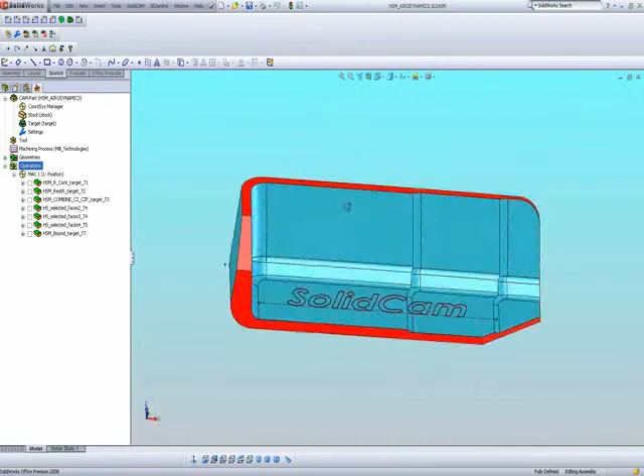SolidCAM has many ways of dealing with parts such as the one we see here. What's special about this particular part, although it may look simple, is that if I were to take a top view of it, you'll see almost every single wall is at a specific angle, and we even have walls in the back which are at an undercut. There's really no way to do this properly using only 2.5D options.

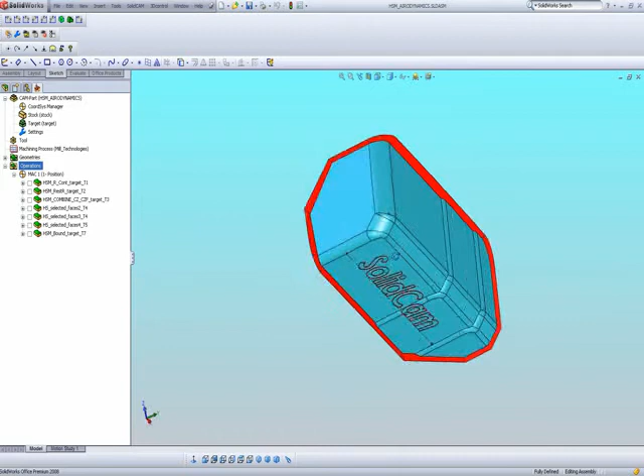So in SolidCAM we have a few options to deal with this. In this particular part, we'll be using HSM, high-speed machining, to mill out most of it. And for those undercut areas and specific surfaces, we'll be using high-speed surface machining. We'll start off with our first operation, which will be a rough cut of our part.

We'll go into the first operation that I've created. You'll note, first of all, I'm using the contour roughing, which basically roughs out most of the material. The tool that I'll be using will be a 20mm tool, a relatively large tool, to get as much material out as possible.

The constraints will be automatic according to the stock material that we have. And for the passes, I'll be going down every 3mm, and I'll be leaving 0.5 millimeters of material for finishing. Remember, you can see all of these options - every single field that I click, you can see what's going on in the picture on the left hand side. Tolerances, step down.

In my links, I'll be working on climb cutting. Let me just go back to my passes area. One other thing I did not note was that I'll be working with detect core areas - in other words, if I can work from the outside into the part, in this particular case I can work in that sort of fashion rather than working from a pocket out. My links, since I'll be working most of the time from outside in, for my ramping, I will do a plunging ramp.

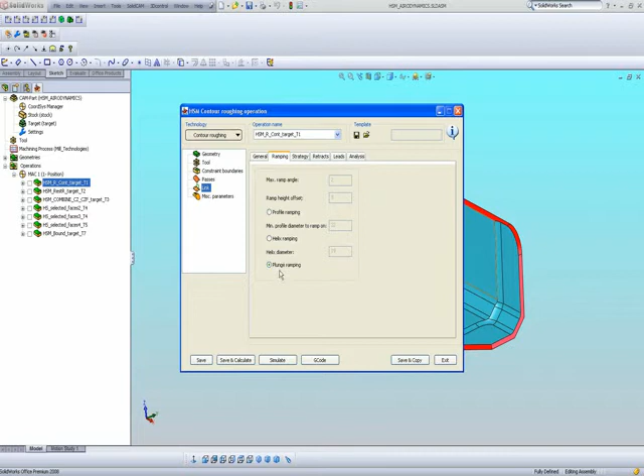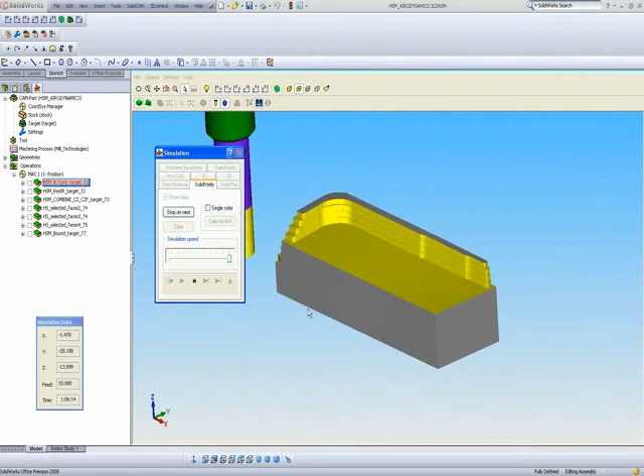Now if I go into my simulation - I'll run the simulation a little slow - you'll note the tool is working from the outside, clearing away most of the material from all sides of the part, wherever there's material that can be taken off.

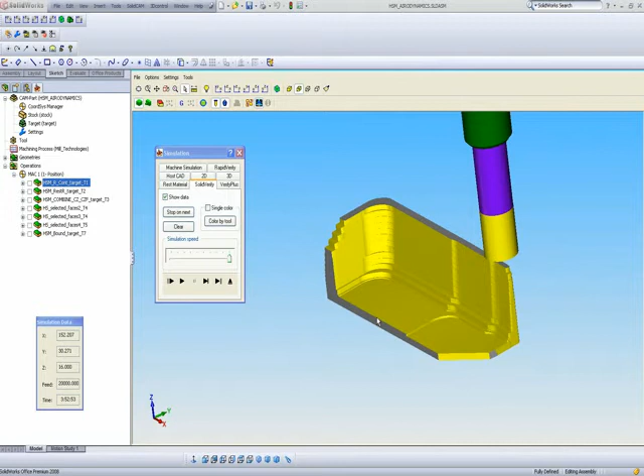Now you'll note also that in some cases the material that was left, since we went down every 3mm, is a little bit too big - these steps over here are a little bit too big for finish cuts. So we'll do another operation, what we call rest rough.

On this second operation, I'll be using, like I said, the rest rough option. The tool, I'll be using a smaller tool, and obviously I'll be going according to the previous operation - in other words, work the rest rough only according to the previous operation marked off over here. For my passes, I will still be leaving 0.5 millimeters, but my step down will be a lot smaller.

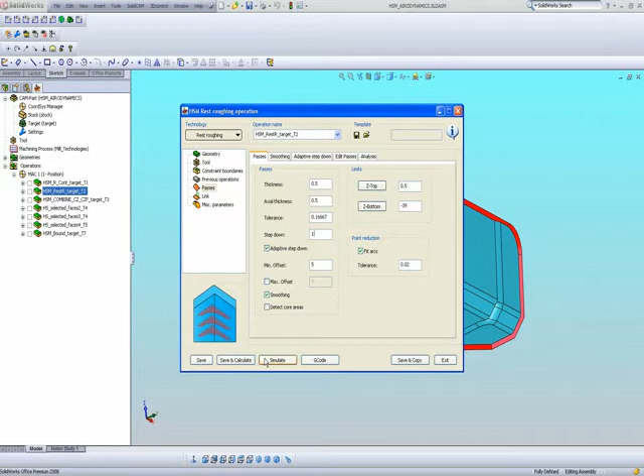But you'll note when it does work - I'll run this simulation over here - it'll only work in those areas where it has to take off the material. Notice, on this wall area, in this whole open area, it did not work - only in the areas where there's material to be taken off. You'll also note that when it goes from one area to the next, it's using the shortest route.

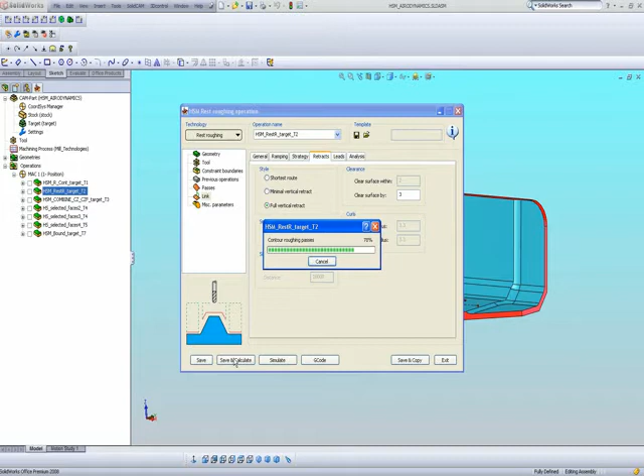This can be pointed out if I bring your attention to the links, as far as my retracts - we have the shortest route. If I were to do full vertical retract, now do save and calculate, you'll note that the tool will go up to the very top every single time it has to go up, instead of jumping over to the shortest possible route.

Next operation, I'd like to start with a finish cut already. And what I like to do with this finish cut is just basically right now to work on this entire surface and this whole inside area.

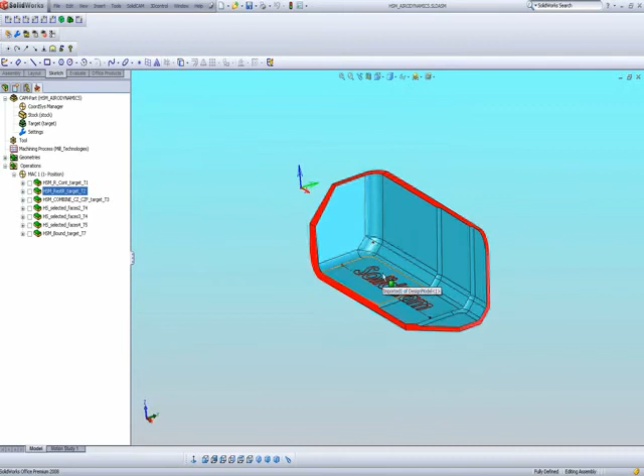But we have two different options to work. First of all, we can work on these walls, these areas over here, using what we call constant Z - we're going down constantly until we get to the bottom. But the flat floors, as we see over here, we have something called horizontal. So instead of doing two separate operations, one horizontal and one constant Z, we have the option of using what we call a combined operation.

Let me just go into my operation itself, and I'll be using a combined Z - I've used combined Z with horizontal machining.

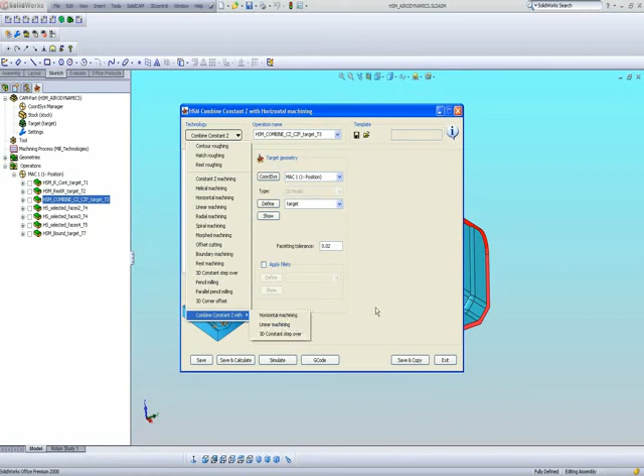Now, my tool that I'll be using will be a 12 millimeter end mill with a 3 millimeter radius at the bottom of the tool. My constraint boundaries, however, this time I'll be using a little bit different.

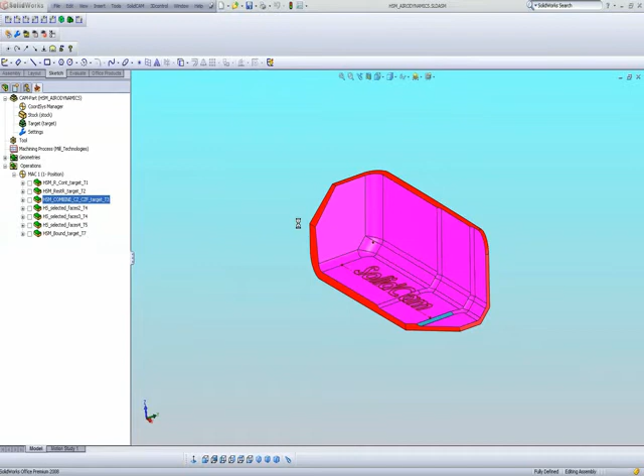I won't create automatically, since I specifically want to work only on these surfaces over here. I've used the option of selected faces. If I go into my selected faces, first of all, you can see the boundary that's created. But if I go into my define area, and I show over here the faces I've selected, you'll see that I've basically selected these faces. These are the faces that I want the program to work on.

Now, if I go into my constant Z, you'll see I have my step down as far as when I'm going down every single time. I have a separate for constant Z my links. I'll be working bidirectional, going back and forth.

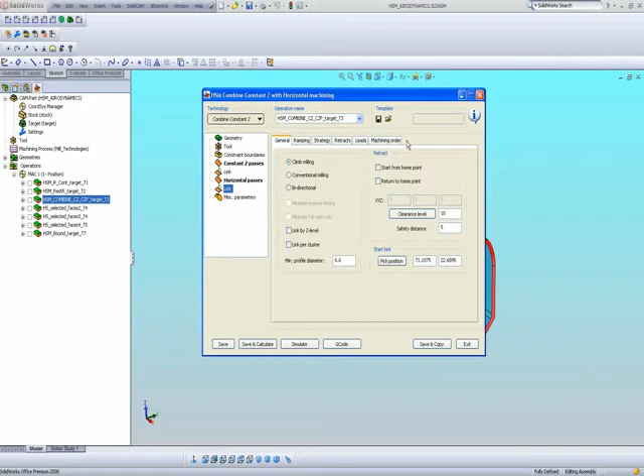And then I also have the option of horizontal passes. My horizontal passes basically is working on the floors of the part. My link, my ramping in, I'll be going in and plunging. And one other thing that's important to notice is that in my link over here, we have something called machining order. In other words, if I want, I can have either the constant Z first, or I can first do the horizontal. In this particular case, I was better off doing the constant Z first.

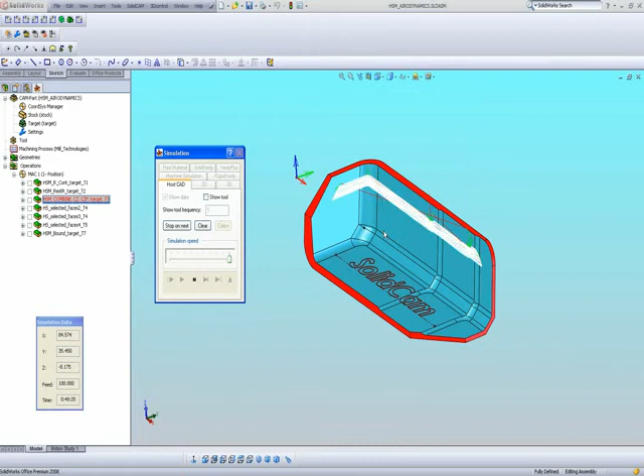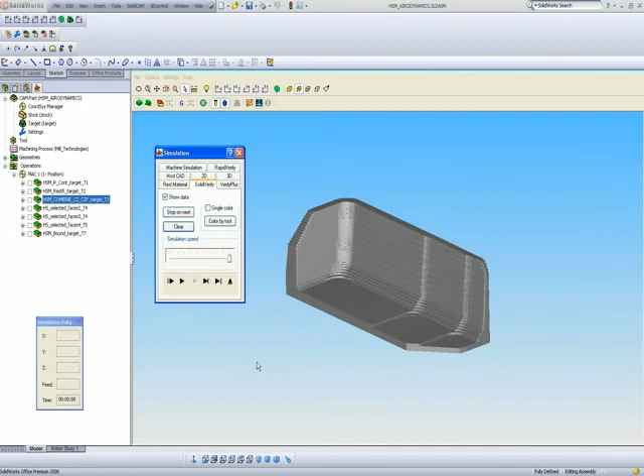And if I go into my simulation, you'll see that the simulation now is working on the walls. And then when it gets to the bottom, it'll work on the floors itself with wide steps, since we have a flat bottom on our tool also. If I were to use my solid verify simulation, you'll note, like I said, the tool is cleaning the outside as it's going down.

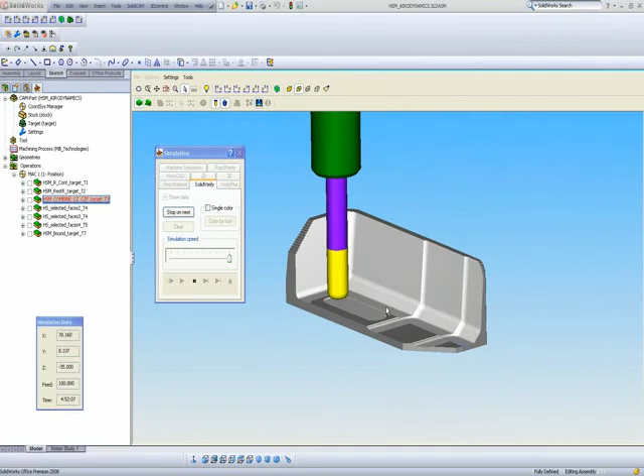And we'll let it run. And as we get down to the bottom, you'll see that it'll start working on the floor itself. You see each floor now is cleaned. And we've basically finished the inside of this part. Now, what you'll notice here also, however, is that we still have this surface here to do, and we also have this area over here to do.

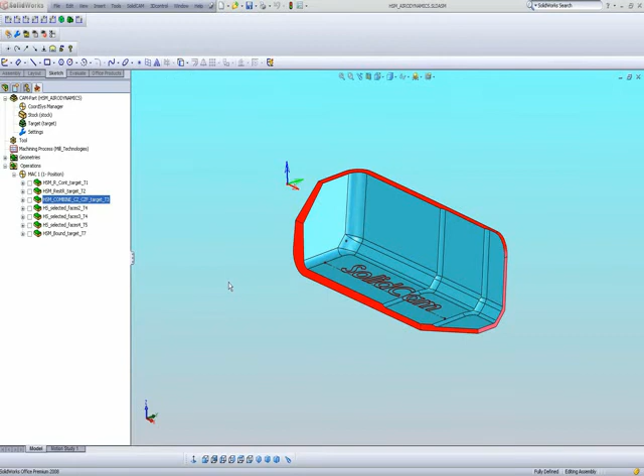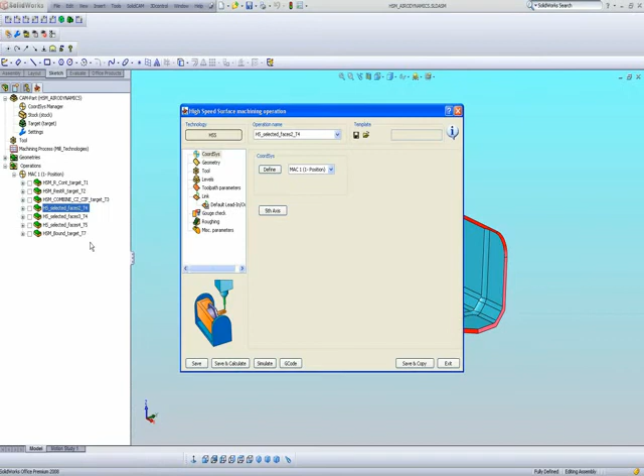Now I can fool around and do some linear operations on these walls, but I'm going to use right now what we call high-speed surface machining to clean these areas. The calculation is very quick, and choosing it is also a breeze. If I were to go into my operation, I have my coordinate system, my geometry, and I've chosen the option of morph between two curves.

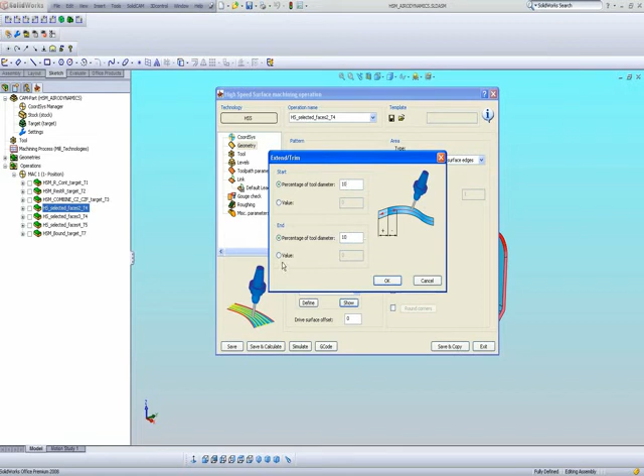In other words, what I'm doing over here is I'll be working on this surface, morphing between this curve and this curve. I have my selected face as shown here. I have my start edge curve as shown here, and of course I have my end edge curve as shown here. If I want, I can even extend the ends so that it goes past the part itself. Extend trim - as you see over here, I can exactly extend past the edge a little, so that way it doesn't stop exactly on the spot itself over there.

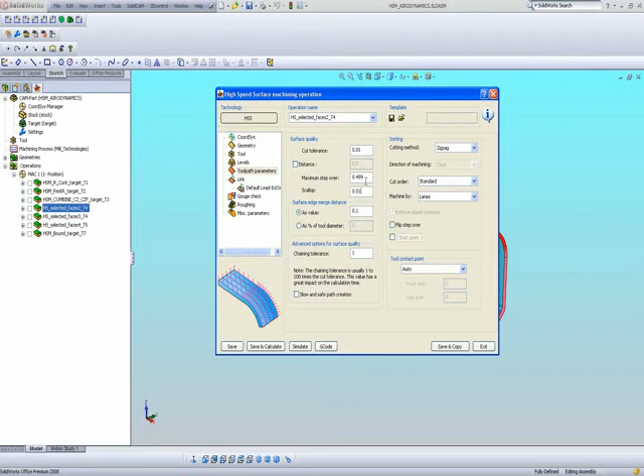The tool I'll be using is a 6mm ball end mill. And my toolpath parameters, you'll note I can use here an option of scallop. If I change my scallop, let's say to 0.2, you notice that my maximum step over is automatically changed also. If I change my maximum step over, you'll note that my scallop is also changed automatically. Everything changes - these two options are connected one to another.

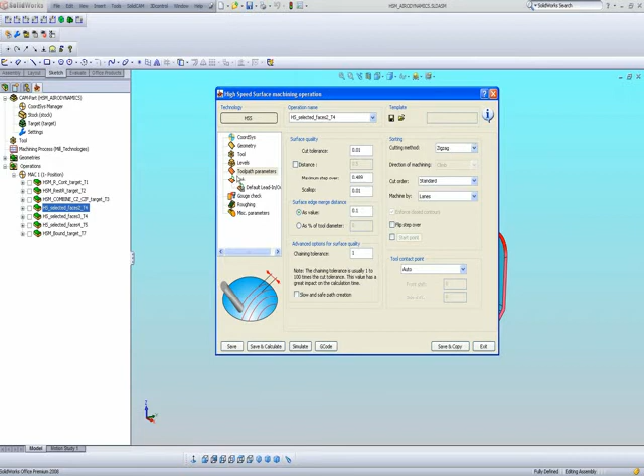Another thing, I'll be working with cutting method zigzag, back and forth. And in my links area, I'll be using a lead in and a lead out. And if there are any gaps, I will connect them. But let's take a look now at my simulation. You'll note the tool is simply going down on the surface, back and forth, and leaving it.

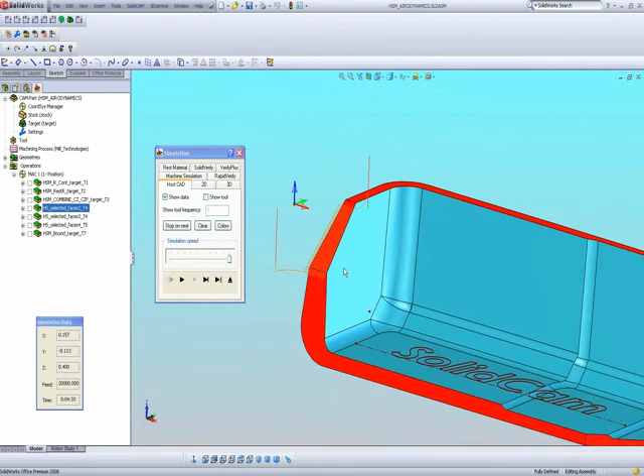Very simple operation. I'll just go back and do the calculation, even though I've calculated it already before, just to show you how quickly the calculation actually is. That was it. Now, I've done the same thing in my next operation for this surface here also. Let's do a simulation of both of these operations, using my solid verify simulation.

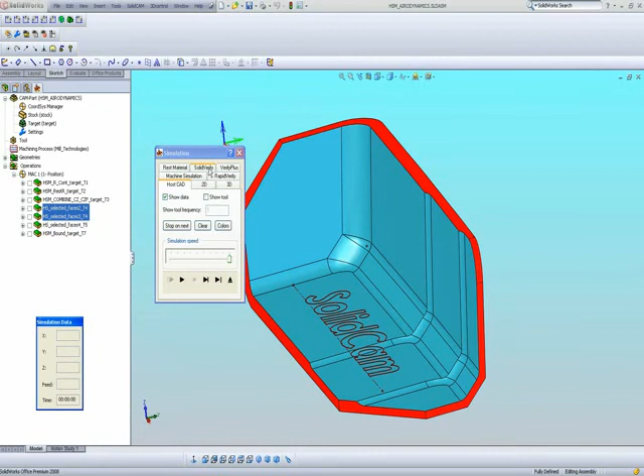You'll see that it basically works on this wall over here and then cleans this surface over here. Done very quickly and very simply.

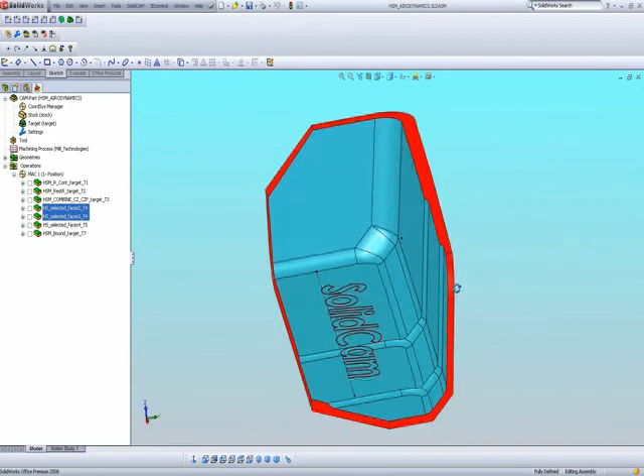Now I'd like to deal with these surfaces in the back over here, including this wall over here, this undercut. Remember, all these walls over here are actually an undercut. In other words, they're in a negative direction if I look from the top down, as you can see.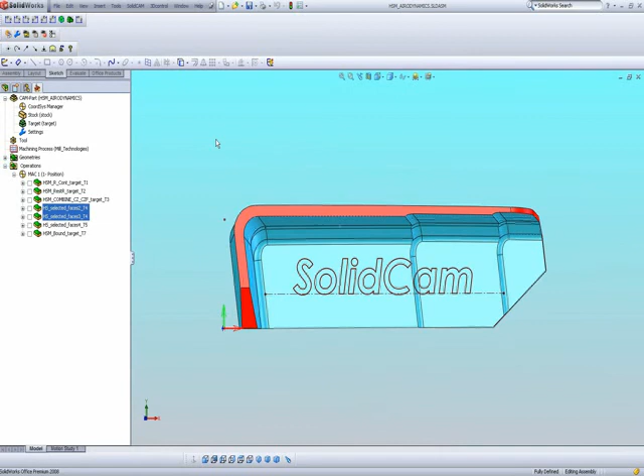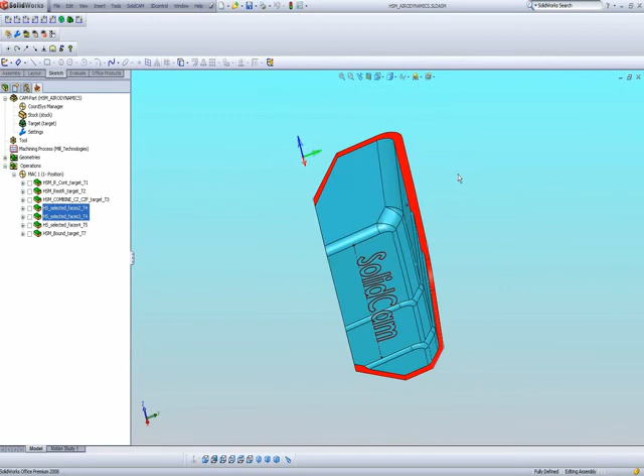So the only way I can really do it now is we have the option of high-speed surface machining, because high-speed surface machining allows us to work on undercut areas and also gives us a tool called gouge control. If it sees the arbor or any part of the tool hitting an area where I don't want it to touch, it won't ruin those areas either. It'll act whether I can pull it away from that area or just stop the calculation and finish my operation at that point.

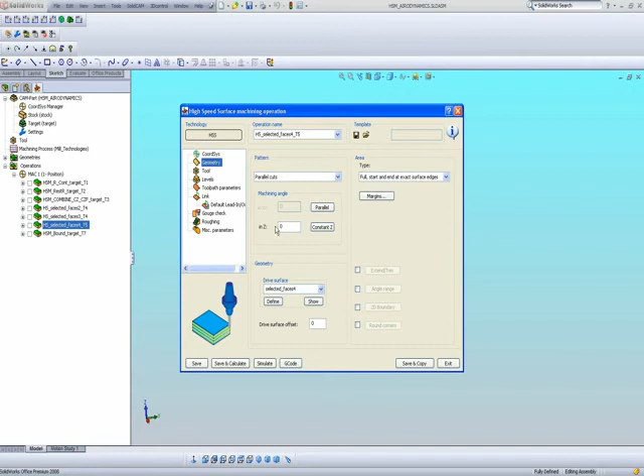Let's take a look at what I've done. I'll open up this operation, and I've simply chose my geometry using parallel cuts in the Z direction. If we look at the faces that I've selected to do, you'll see I basically selected, I've even selected these sides over here also to have one smooth cut all around.

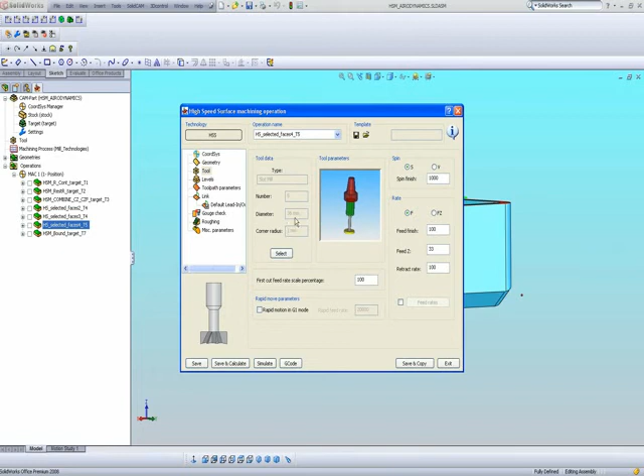Now the tool that I will be using in this particular case will be a slot mill, a T-cutter, or Woodruff cutter, whichever name you prefer. I'll be using a diameter of 36 millimeters with a 1 millimeter radius. And we'll also note that the arbor itself is a 10 millimeter arbor.

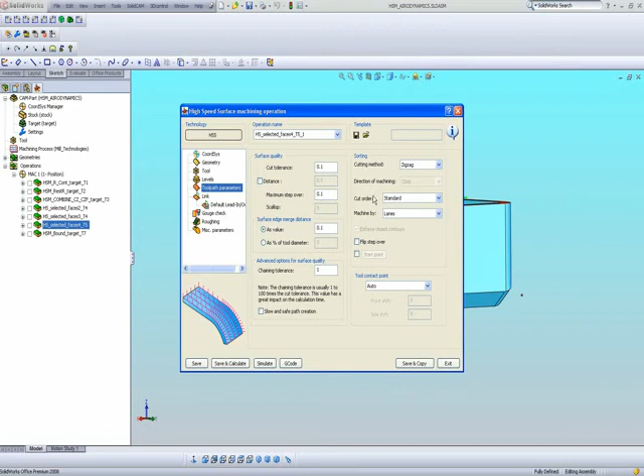Now, my toolpath parameters, I'll be going down every 0.1 millimeters, and I'll be working zigzag. Now, of course, I have my links. I'll be going in and out using a radius.

But we have here something else which I've mentioned before. We call it gouge check. In my gouge check, I've enabled it, and I've said, okay, if I see that my holder or my arbor hits any of the drive surfaces, in this particular case these are the drive surfaces I'm worried about, I can tell it to move tool away, or even stop tool calculation.

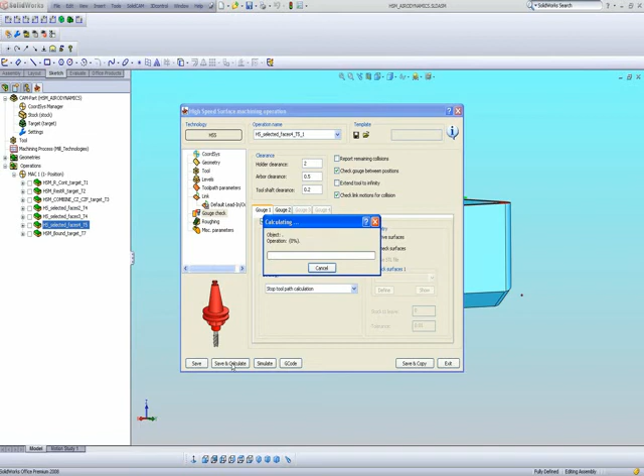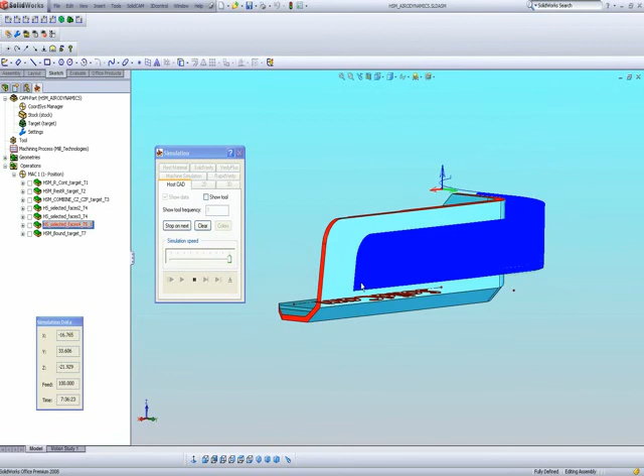If I do save and calculate, which is also relatively quick, and then do my simulation when this finishes, first of all, let's take a quick look at our toolpath, and you'll see that the toolpath goes down on the side over here, coming in from the outside over here. Remember, I've gone down every 1/10 of a millimeter to give it a nice small surface.

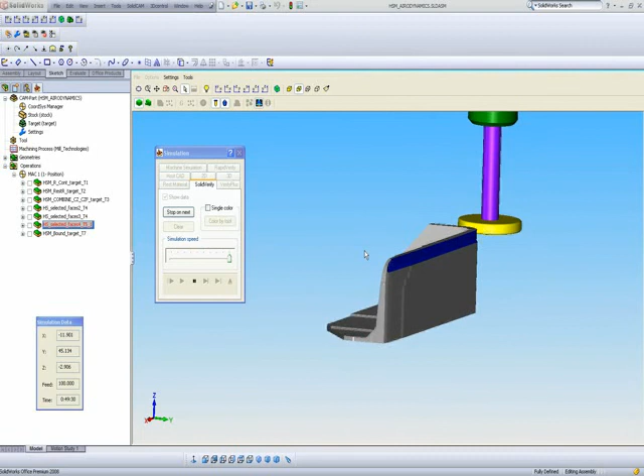Now note what happens when it gets to the bottom. It'll curve its way underneath and then retract to the outside. If I were to use Solid Verify instead, you'll see that the tool is working its way around the back. And if I were to use the top view and get rid of my holder...

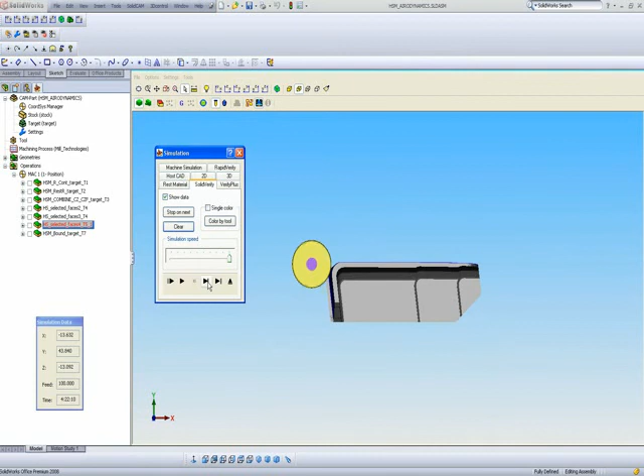You can see exactly what's going on. Let me just stop it here for a moment and just do one step at a time. You'll see now that the tool, when it gets to this area here, I'll try and stop it again. You can see already over here that the tool is actually underneath the top of the surface. It's already past that area.

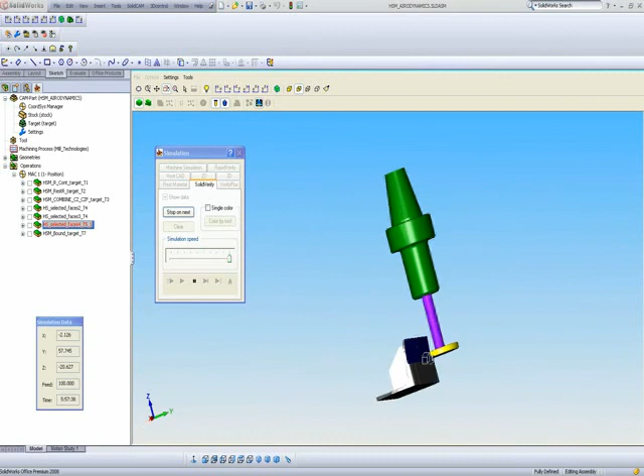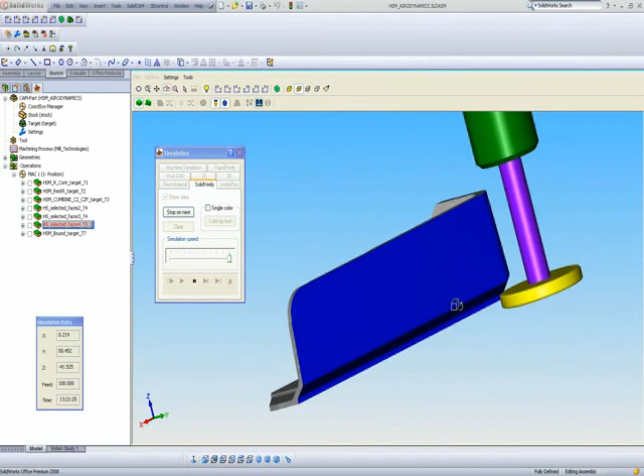Let me just continue now with the rest of my simulation. Now bring the tool holder back, and you'll see that's all being cut exactly the way it should be. As it gets down to the very bottom, you'll see it'll start curving its way in. And basically now we've cleared off all that material that still has to be cleared off.

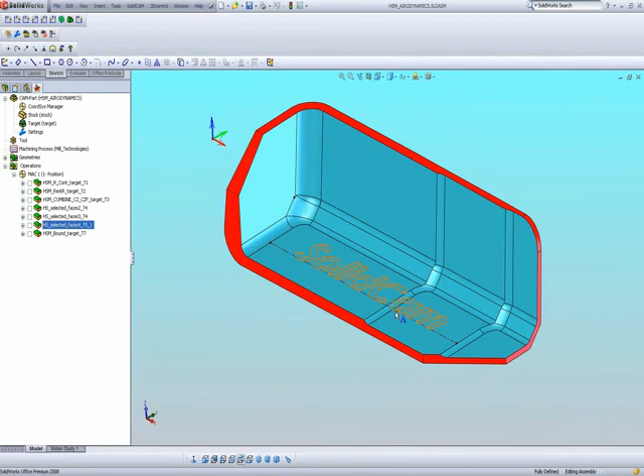Now, the last thing I like to do just to finish off this part is, you see this text over here? I like to actually engrave this text onto the part itself. So the way I've done it is, again, I've used this time the HSM option, and the option that I've used there was boundary machining.

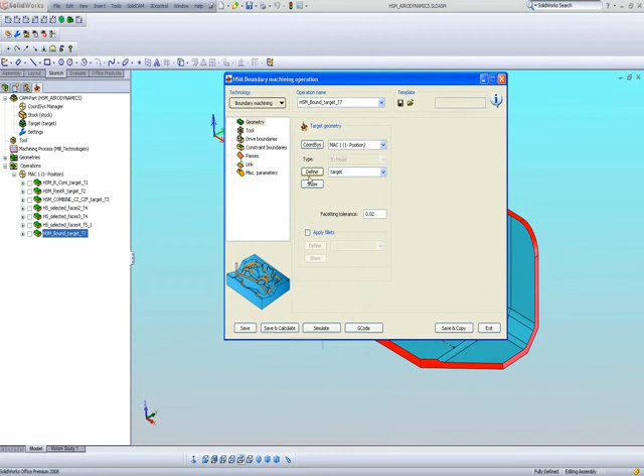Basically what that does is I pick the boundary that I wanted to work on, such as the text that I've seen here, and I'll show that to you in a moment, and I wanted to go with a tool that has a point at the bottom, and I want to basically go on the drive boundaries, which is my text, and I want to continue. I want to work obviously in the middle.

My constraint boundaries is obviously my part itself, and all I've done is in my passes I've told it axial thickness of minus 0.2. I left my regular thickness as 0, but axial thickness of minus 0.2. By doing this, I've actually forced the tool to go further into the part itself.

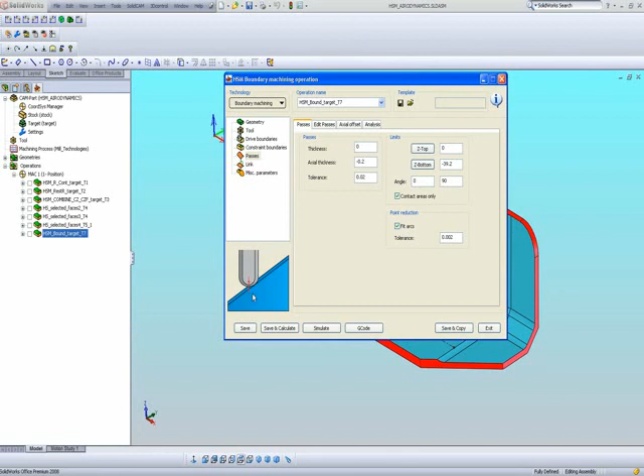Let's just take a quick look at my simulation, and you'll note that my toolpath goes on the text itself. And if I were to use my Solid Verify option of simulation, you'll note, you can see in my simulation that the text is being machined out exactly the way it's supposed to be done, all the way to the bottom.

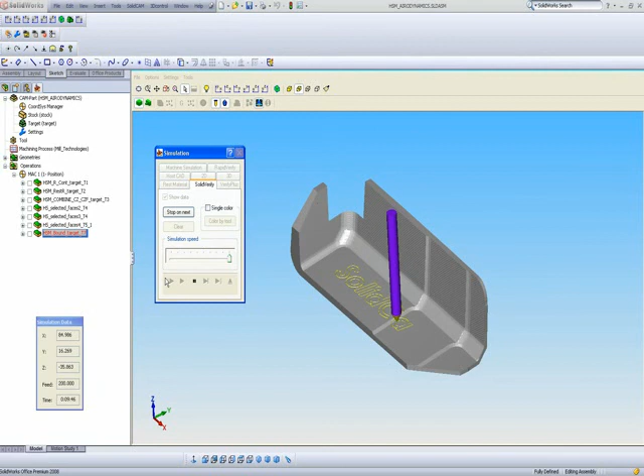Basically now we've completely finished machining out this entire part using HSM and the HSS options.